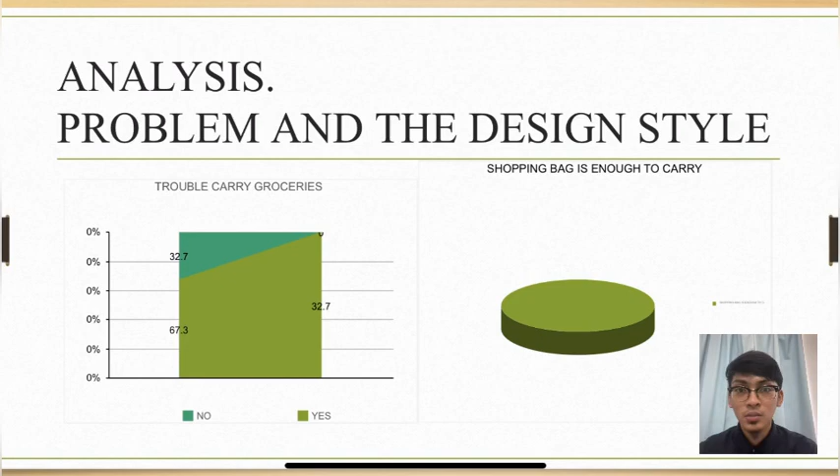Okay, I will continue to the problem and design style. Most respondents have trouble carrying groceries, and the shopping bag does not have enough space to carry stuff while shopping. And last but not least, customer requirement. Our survey chart shows the respondents agreed and supported our project.

Thank you. Chapter 3 is design specification. 3.1 Design Parameter Identification, House of Quality.

Engineering characteristics for our design: the multifunction smart trolley is easy to use, reduces jamming probability, is more attractive, acquisition cost is low, maintenance cost is also low, lead time of response dimension is big, and can fill more items in the smart trolley. More quality of customer interface, and the smart trolley is safe to use and good for every age.

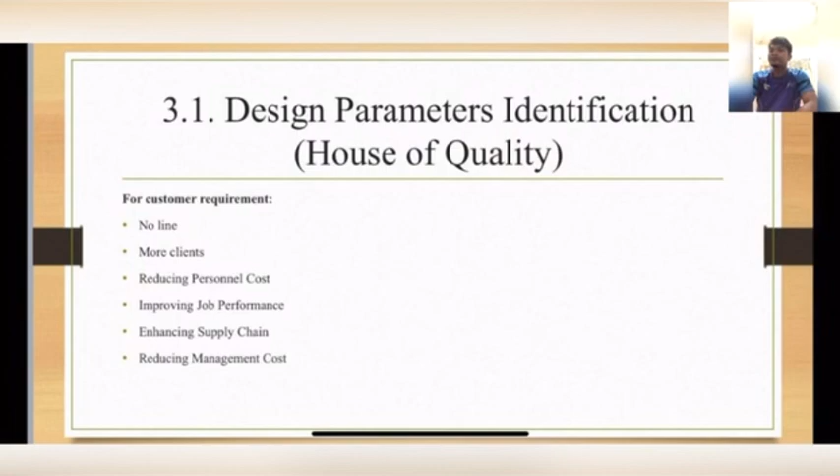You can also refer to the HOQ table for the customer requirement: no line, more clients, and more. Engineering characteristics are ease of use, jamming probability, acquisition cost, maintenance cost, lead time of response, dimension, quality of customer interface, attractiveness, and safety.

For no line, the important weight factor is 5: ease of use is 3, jamming probability is 1, lead time of response is 9, attractiveness is 1, safety is 9.

For more clients, the important weight factor is 4: ease of use is 9, jamming probability is 3, lead time of response is 3, quality of customer interface is 3, attractiveness is 9, safety is 9.

For reducing personnel cost, the important weight factor is 2: acquisition cost is 9, maintenance cost is 1. The others for that have no data.

For improving job performance, the important weight factor is 4: ease of use is 1, jamming probability is 9, maintenance cost is 9, lead time of response is 3, safety is 3.

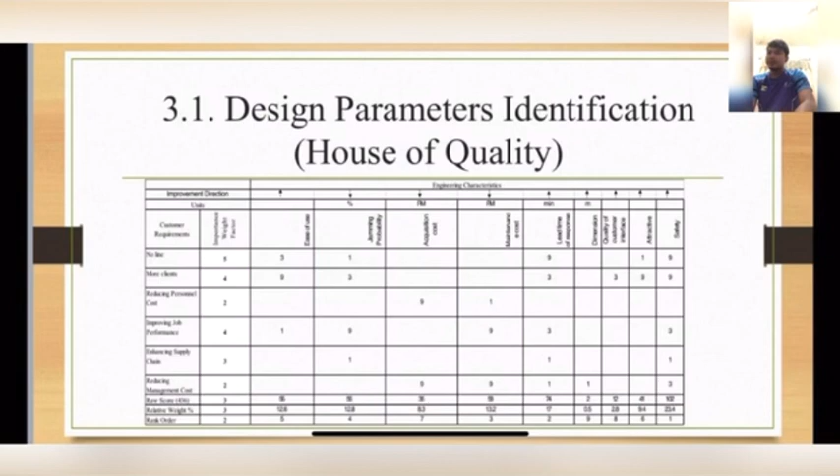The rank order: safety is number 1, lead time of response is number 2, tied with important weight factor of 2. Number 3 is maintenance cost. Number 4 is jamming probability. Number 5 is ease of use. Number 6 is attractiveness. Number 7 is acquisition cost. Number 8 is quality of customer interface. Number 9 is dimension.

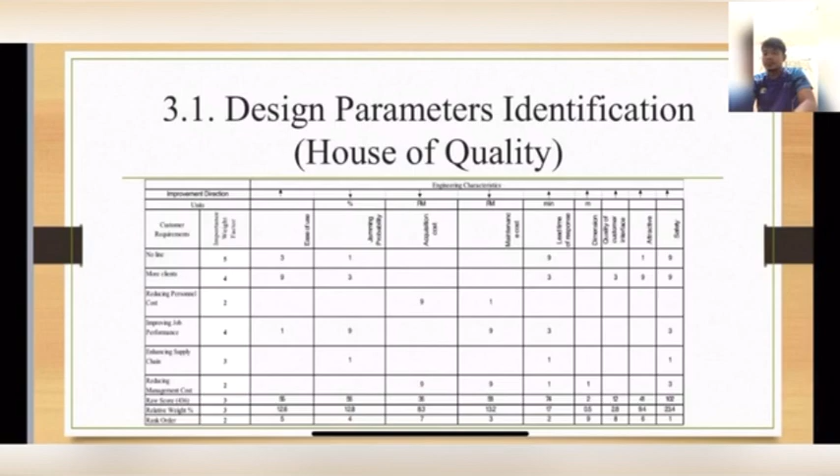For 3.2, product design specification. Product identification: the product name is multifunctional shopping trolley. Basic function: the purpose of the multifunctional shopping trolley is for people in a mall or supermarket. For example, the multifunctional shopping trolley can prevent jams in the mall and no line is needed to pay for items. They can also move the trolley with the controller.

Special feature: the user can use the trolley by moving it automatically using the controller. The trolley also provides an RFID reader to scan items. This scanner has NFC technology installed that combines RFID, radio frequency identification in the scanner, so that the sale item is scanned much faster and more efficiently with a communication based on line of sight, LOS system.

For the payment, the present payment system on the till and self-service checkout is also for debit card and cash payment. However, for security reasons and to detect fraud, the proposed system can only accept card payment. This can be achieved by scanning the card to the RFID reader to proceed with payment.

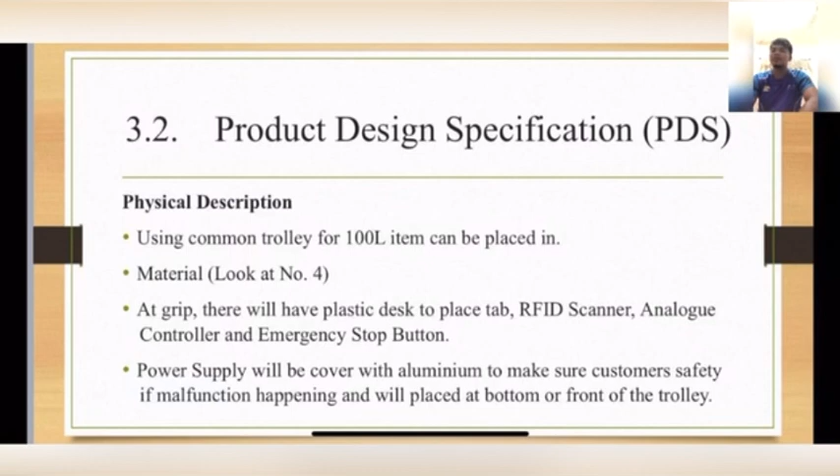Manufacturing specification is all components will be developed at UniMAP Pauh Putra. Others will be custom off-the-shelf (COTS). Supplier is TBD and online shopping.

For market identification, the target market for the product will be supermarkets and shopping malls. Initial launch is Arau, Perlis. Initial product run is about 300 units. Based on market acceptance, expand to selected malls that will be interested in this design in year 4.

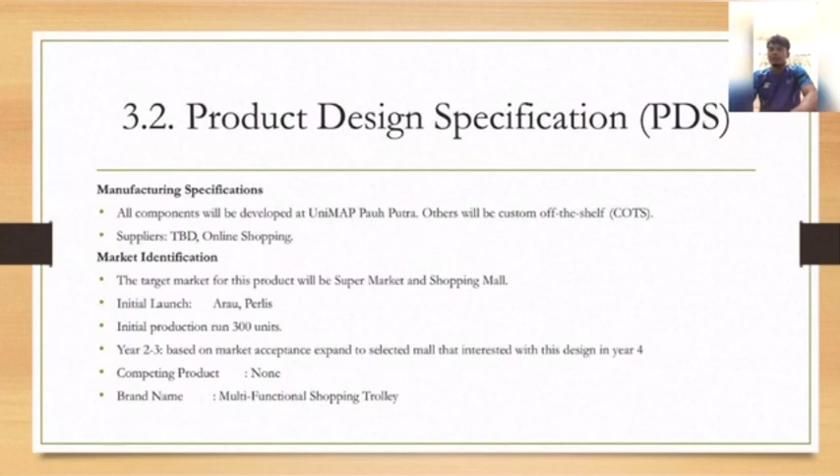Competing product is none. Brand name is Multifunctional Shopping Trolley. For the financial requirement, pricing policy is over the life cycle. Target manufacturing cost is about 400. Estimated retail price is 450.

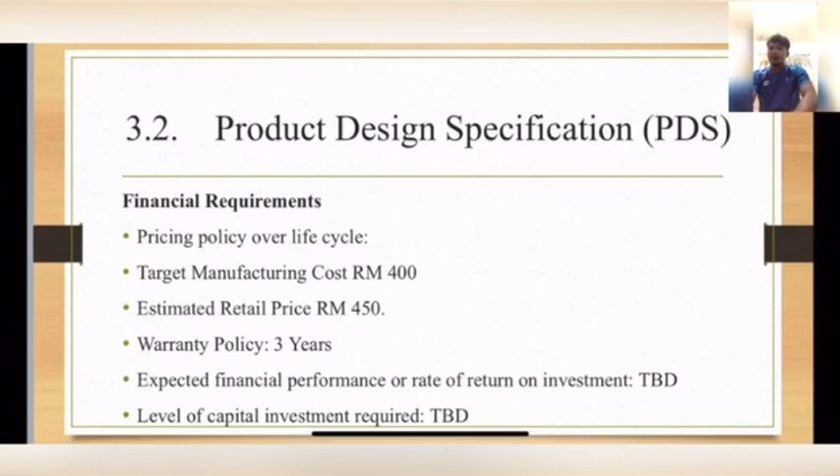Warranty policy is 3 years. Expected financial performance or rate of return on investment is TBD. Level of capital investment required is TBD.

Life cycle target: we target this product's lifetime to be about 3 years because the components are all high quality and environment friendly. However, the maintenance of the multifunctional shopping trolley is about 2 times per year to maintain the trolley always in good condition.

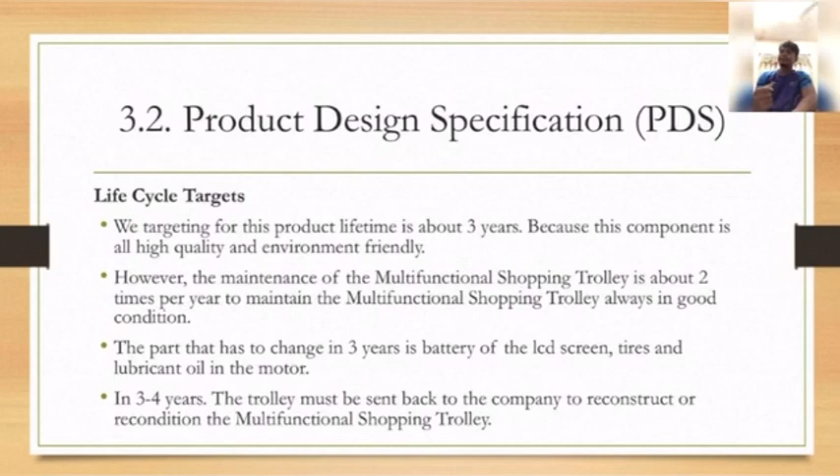The parts that have to be changed in 3 years are the battery of the LCD screen, tire and lubricant oil in the motor. In 3 to 4 years, the trolley must be sent back to the company to reconstruct or recondition the multifunctional shopping trolley to make sure the trolley remains in great condition.

Social, political and legal requirement is safety and environmental regulation will be followed. Safety and product liability: make the emergency stop button more efficient and functionable without power supply, to prevent unexpected incidents between users. Intellectual property is smart trolley.

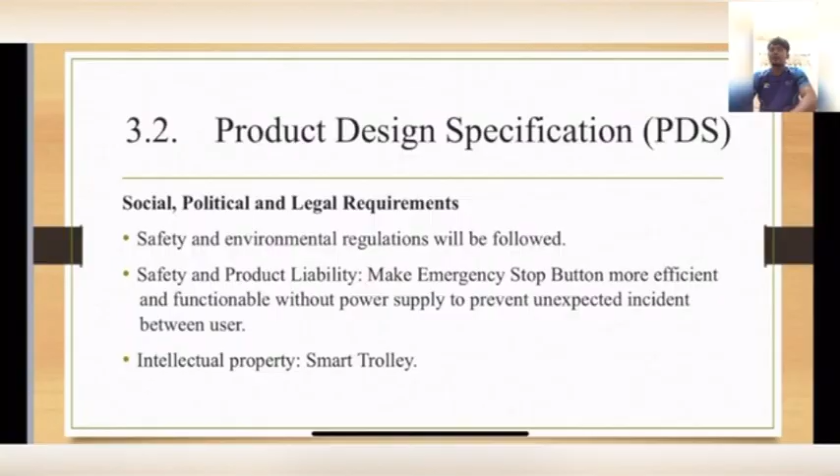I will explain to you all about concept generation. Concept generation provides two tasks for engineers: to improve their level of creativity and to learn design methods that improve the odds of finding a creative solution. This project starts with a brainstorming session to come up with many ideas so we can make some choices with the design, and finally the multifunctional shopping trolley has been generated. This chapter also combines all the modifications that we have discussed for our project.

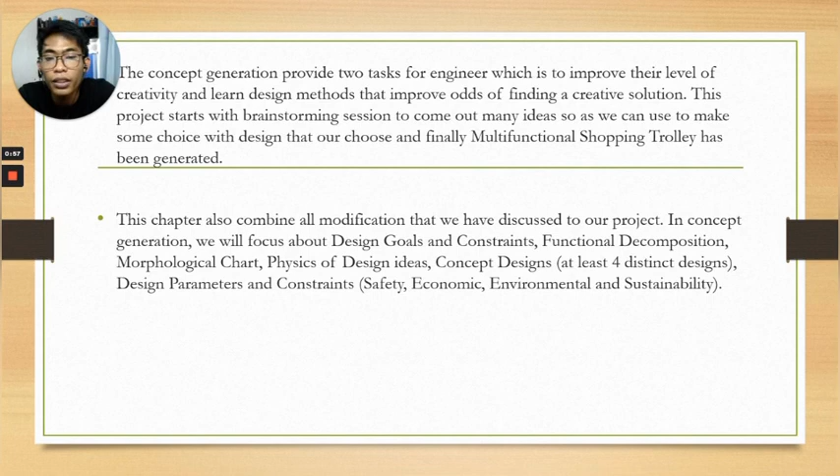In concept generation, we will focus on design goals and constraints, functional decomposition, morphological chart, physics of design ideas, concept designs, design parameters and constraints.

4.1 Design Goals and Constraints. We had a brainstorming session with all of the group members in order to generate some innovative ideas on how to proceed with this project. Brainstorming is a process of generating ideas that design teams use to generate new concepts. Alex Osborn devised this strategy in order to inspire the creation of innovative magazine advertising.

Using a checklist to assist in producing new ideas is one technique to aid the brainstorming process. A SCAMPER checklist, for example, may be used as a stimulant when the flow of ideas starts to dwindle during the brainstorming session. Elber also has made some modifications to this SCAMPER.

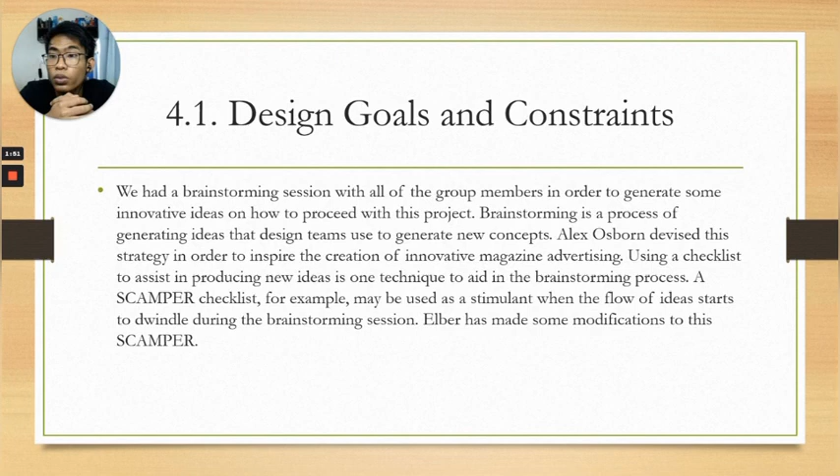4.1.1 Existing single functional. Some present single function items have been transformed into more imaginative and innovative designs in order to keep the product more functional while offering a variety of style to attract the attention of customers.

The first product we use is the Trolley. A trolley is used for carrying loads or to transport material at various points.

The second product is the Tablet. The tablet will show and display the items that they choose to add to their cart, and it also displays the total amount the customer has to pay after they're done with their shopping.

The RFID reader is used to scan a credit card or debit card when a customer wants to make a payment, and they can also use the RFID scanner to scan a barcode for an item they choose and put it into the cart displayed on the tablet.

Analog stick. The left figure shows us an analog stick to control movement of the trolley. Customers don't have to push or pull the trolley, but just use the analog stick to move the trolley toward the direction that the customer wants to move.

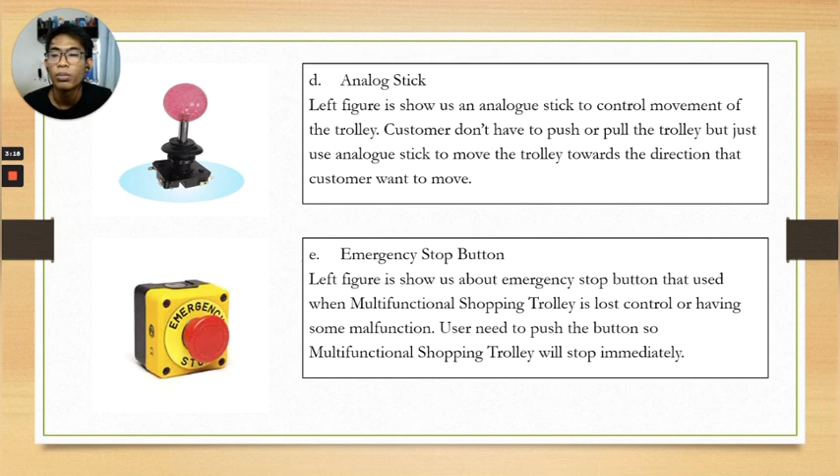Emergency stop button. The emergency stop button is used when the multifunctional shopping trolley is out of control or having some malfunction. The user just needs to push the button so the multifunctional shopping trolley will stop immediately.

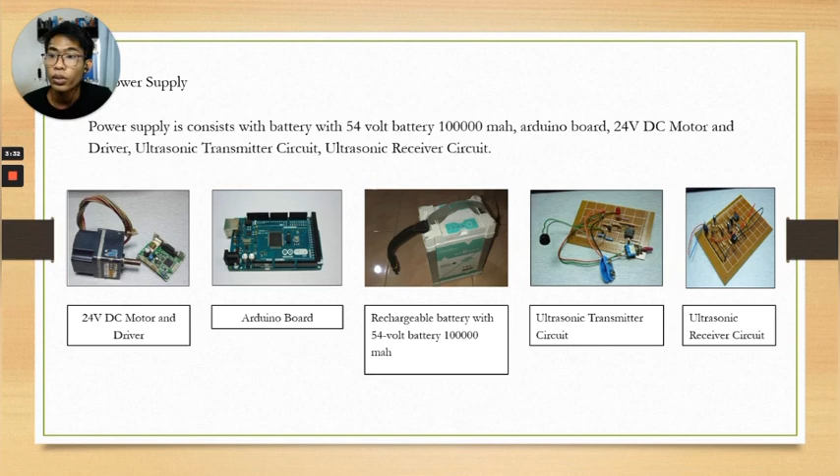Power supply consists of a 54 volt battery with 100,000 mAh, an Arduino board, a 24 volt DC motor and driver, an ultrasonic transmitter circuit, and an ultrasonic receiver circuit. The RFID gate scanner is used to scan items that were not scanned with the RFID reader and items that have not been paid for yet. This also triggers an alarm to prevent theft.

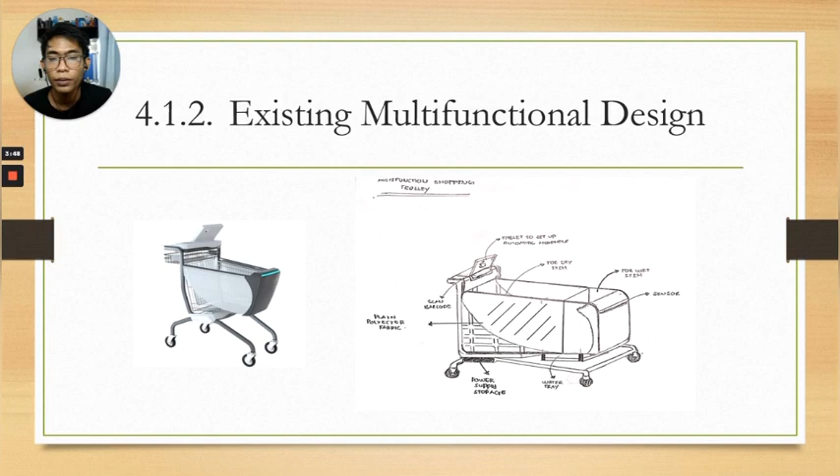This is our existing multifunctional design: a multifunctional shopping trolley with a tablet, RFID scanner, analog stick, and emergency stop button. All of these functions have been shown in part 4.1.1.

An Arduino Uno, a battery, and an ultrasonic transmitter and receiver circuit are all housed in the trolley's power supply unit. The battery will power up and activate the main board, the Arduino board, and the ultrasonic transmitter unit will be used to link all of the components, including the tablet, RFID scanner, analog stick, and emergency stop button, to the Arduino board. As a result, when the power is turned on, the ultrasonic transmitter unit will broadcast the signal at the frequency that has been programmed into the main board of the device.

Battery, Arduino Mega 2560 board, 24 volt motor drivers, and ultrasonic receiver circuit are the most important components of this project. The battery will provide power to the motors, motor drivers, and the Arduino board, among other things. The ultrasonic receiver circuit is designed to receive and process the signal sent from the analog stick, analyzing data signals and ultrasonic receiving circuits, as well as providing feedback on shopping cart movement by sending signal to the motor drivers, who in turn operate the motors using analog signals, which is the function of the main board.

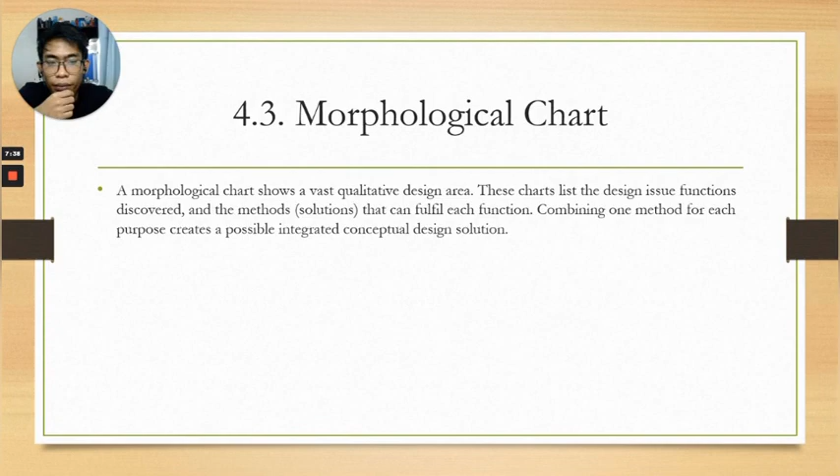Physics of design ideas: Trolley. Its function is used for carrying load or transporting material at various points. This trolley will be modified so that the power supply is placed in front of or beneath the trolley, depending on which design is best. Its purpose is to power all the components added to this trolley. However, the power supply's primary function is to move the trolley.

This trolley can be moved using an analog stick. There are many components we add, such as tab, RFID scanner, analog stick, emergency stop, emergency power button, and power supply.

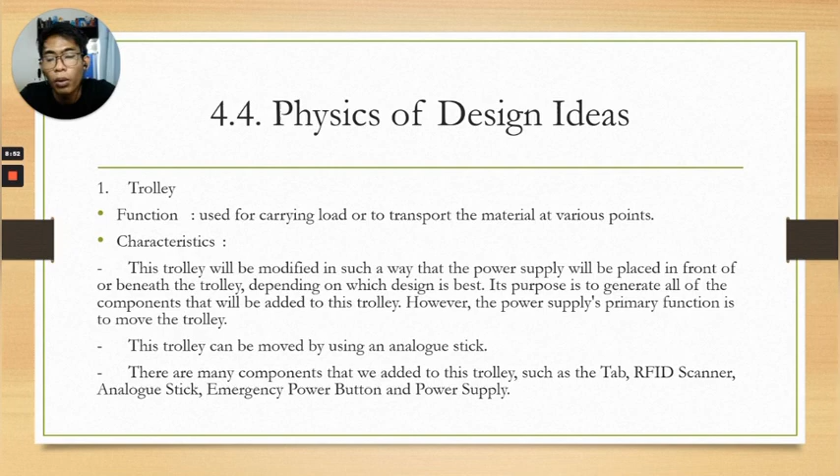Second is the tab, which displays all items the customer chooses and displays the total price for the customer to make payment. The characteristic is the tab will be put on a plastic desk that we made, with a plastic board that grips the trolley. The third is the analog stick and emergency stop button.

The function of the analog stick is to control movement of the trolley, and the function of the emergency stop button is to stop the trolley, cut all power supply, and turn it off. Characteristic: the analog stick and emergency stop button are also attached to the plastic desk by a tab.

The RFID reader has two functions: to scan the barcode of an item if the customer chooses to pick and buy it, and to scan a credit card or debit card if the customer wants to make a payment. The characteristic is the RFID reader is also placed on the plastic desk along with the tab, emergency stop button, and the analog stick that controls movement of the trolley.

And the last is the RFID gate scanner. Its function is to scan items not scanned with the RFID reader and items not yet paid for. It will be installed at the entrance to a shopping mall or supermarket. It will sound an alarm if a customer tries to steal an item without paying for it, making sure the security at the mall is strong.

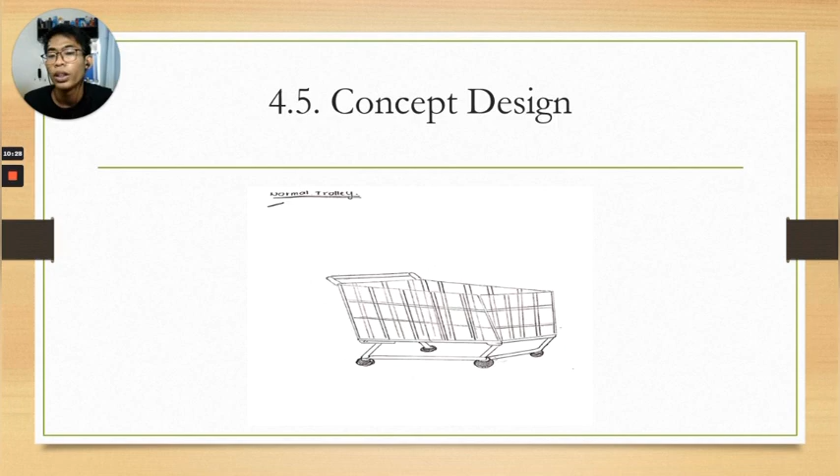This is our concept design. The first concept design is just a normal trolley - it's not our actual concept design. The first design is the scan shopping trolley.

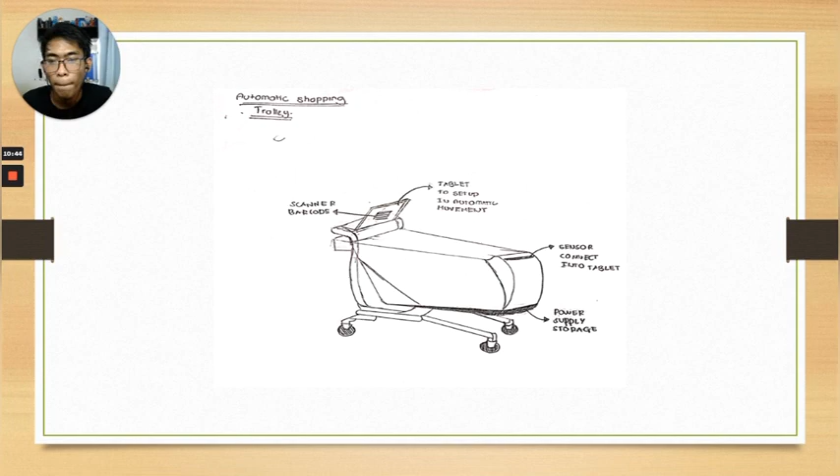Second design is the warehouse trolley. The third design is the automatic shopping trolley. The last is the multifunction shopping trolley.

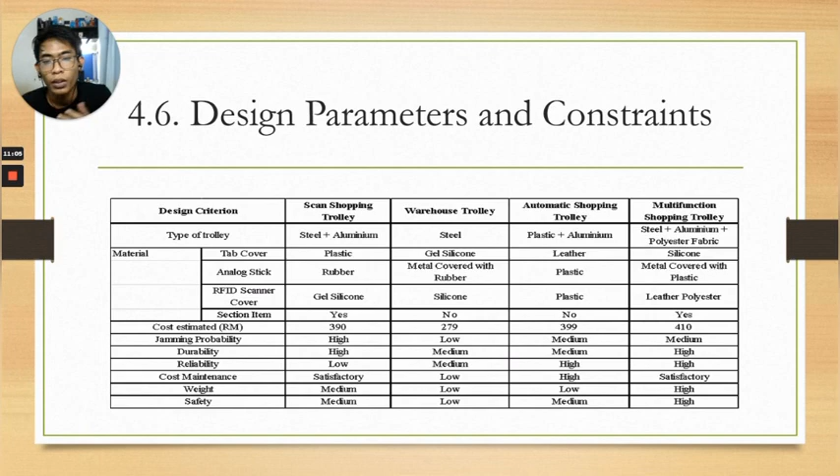For design parameters and constraints, you can see the design criteria we chose: type of trolley, material, cost estimated, jamming probability, durability, reliability, cost maintenance, weight, and safety, for the four designs that we chose and designed.

The table shows four designs that we create, including the type of trolley and the material used, which is an important feature for all the trolleys. In addition, the cost of creating this design was estimated. We just took all the trolleys at the shopping mall to make some innovation.

That's all, thank you. We go to the next chapter.

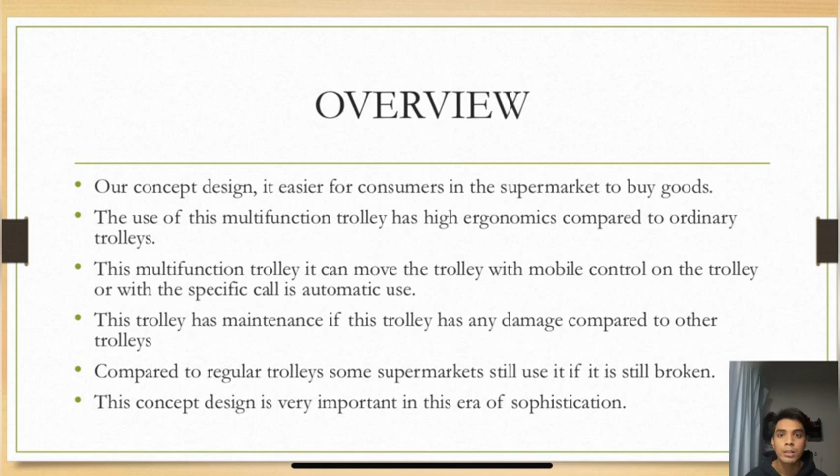Overview: our concept design makes it easier for consumers in the supermarket to buy goods. This multifunction trolley can move the trolley with mobile or tablet control. Other than that, this multifunction trolley concept is very important in this era of sophistication.